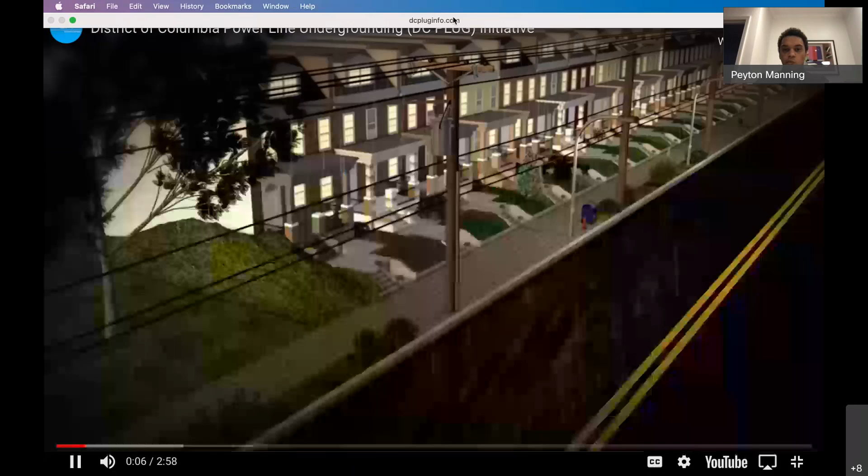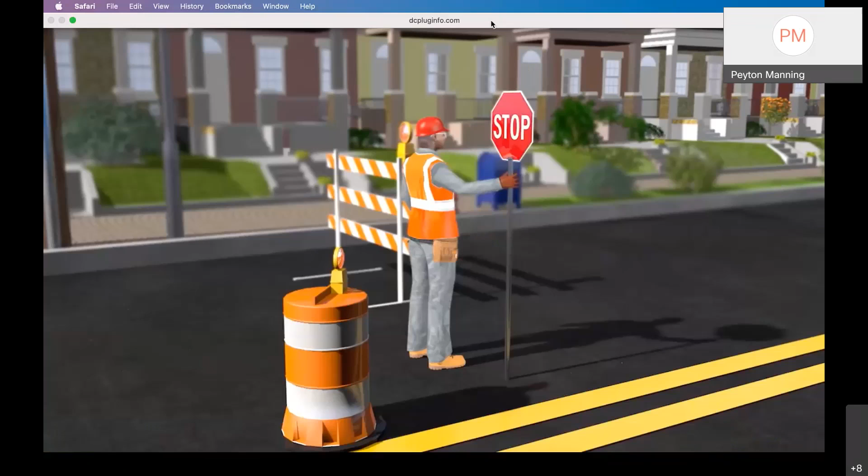The District of Columbia has experienced more violent storms in recent years, resulting in extensive power outages. For this reason, the district and PEPCO are working to reduce power outages by moving many of the overhead power lines underground to improve the infrastructure and enhance resiliency. Neighborhoods affected by construction will be notified well in advance of the project start date. This will include the posting of no parking signs. Construction will begin with the coordination of streets and sidewalks impacted in your neighborhood. Signs will be posted, and flaggers will direct vehicles and pedestrians around construction crews.

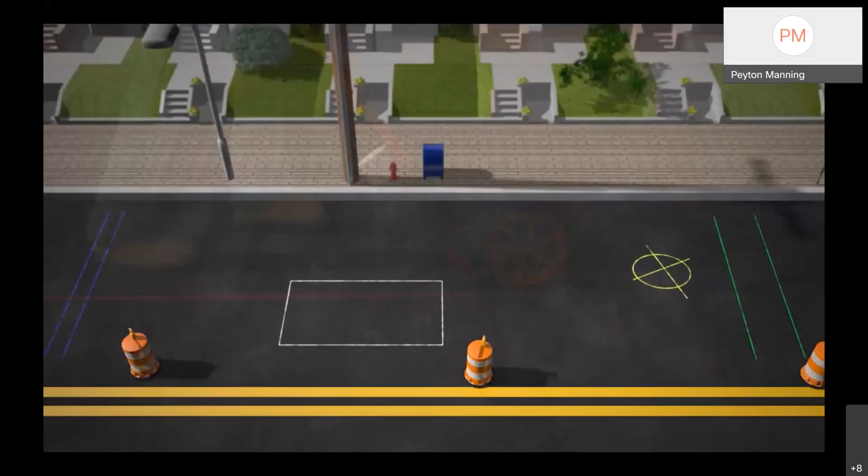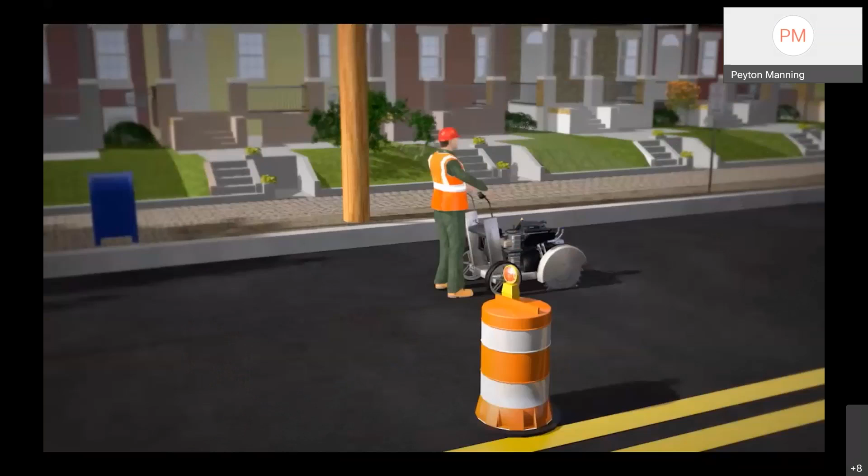Before any digging begins, other existing utility lines that may be in the path of construction will be carefully identified and marked in the field. In some cases, small plants, trees, and grass will need to be removed from public spaces to allow for digging and placement of new underground equipment. But we will do our best to retain as much vegetation as possible. Any public property disturbed by this work will be restored to its original condition. Construction workers will use asphalt saws to cut the pavement. A backhoe will dig a trench for the placement of the distribution line.

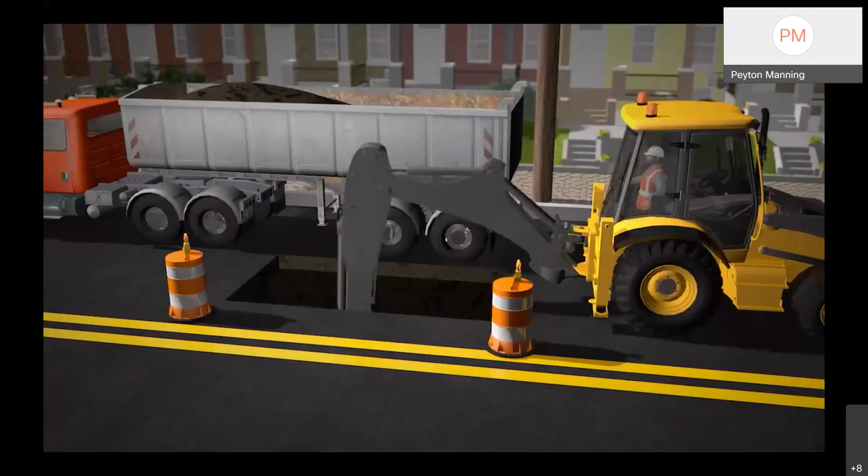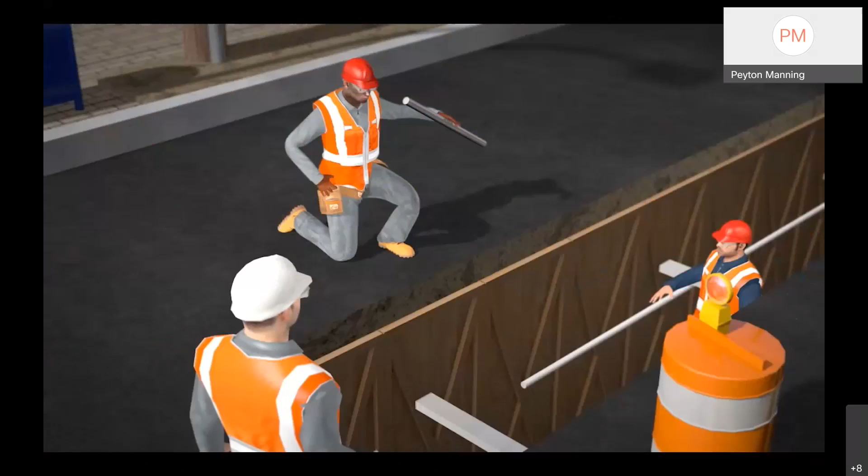Periodically along the main primary line, manholes and tap holes will be required to house equipment and to provide access for inspections and repairs. The backhoe will also be utilized in these cases to excavate for these structures. In order to meet jurisdictional safety requirements, shoring will be provided in the trench to ensure stability. Pepco uses either fiberglass or plastic PVC conduit to protect underground power lines. Concrete will be poured into the trench to encase and secure the conduit, and steel plates will be placed over the trench temporarily to make the road usable to vehicle traffic. After the concrete is set, the steel plates will be removed and the trench will be repaved in sections.

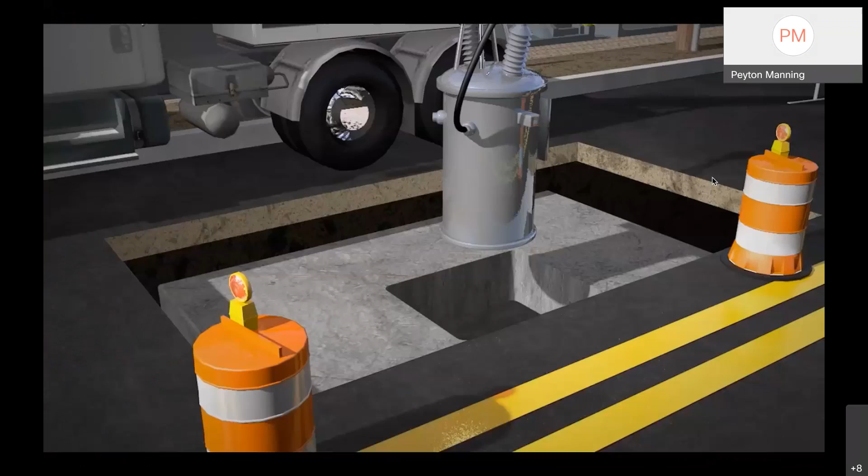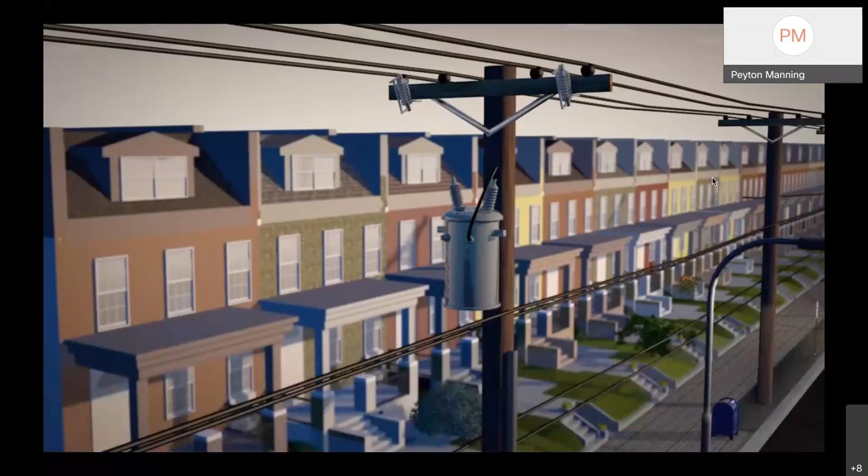Transformers, switches, and other ancillary equipment will be set in place. Equipment such as transformers and switches will be installed either in the roadway or the sidewalk, depending on space availability. Underground cable will be installed. Landscaping will be restored as needed and roads paved. Overhead primary electric wires will be removed from poles, but secondary service and communication lines will remain. Finally, the new underground power lines will be energized. While electricity will remain on throughout the project, there will be a short scheduled outage needed to switch from the overhead lines to the new underground system. We appreciate your patience while the district and Pepco improve the future of electrical service for the District of Columbia residents.

Great. I hope that gave everybody a better understanding as to what the construction will look like when we start. And now I'd like to pass it on to the region president, Donna Cooper, to give some brief opening remarks.

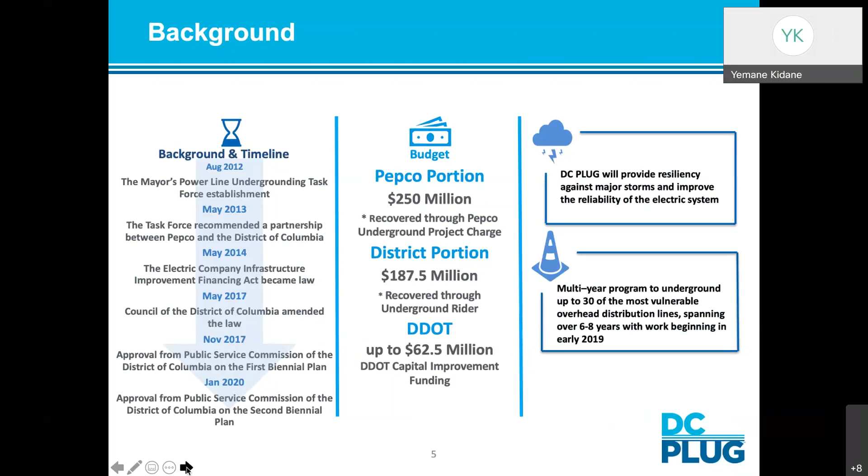Good evening, everyone. My name is Yemane Kidane. I'm the project manager from PEPCO side for DC PLUG. So Dana gave a good background and history on the program, so I'll focus on the scope. So the scope, this schematic here shows the existing overhead system, and on the next page we'll see, when we underground the primaries and laterals, the impact through the outage that residents will see.

As you can see on this diagram here, there is a tree at the top corner of this page where when it falls, as the color changes from green to red, that means each house is seeing an outage as a result of a tree falling on a primary line. You can tell that the entire neighborhood is being impacted by one tree falling on a primary line. So the scope of DC PLUG is to underground primaries and laterals. As we do that, the next page will show the resiliency that will be achieved by undergrounding. Please go to the next page.

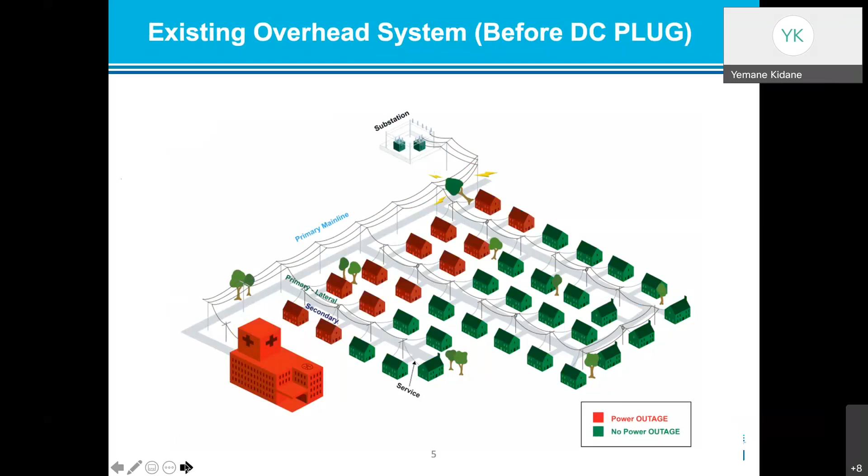Now the dashed lines here represent the undergrounded feeder. So as you can see, when the tree falls, there's no overhead primaries, so it's not gonna hit any wires, and then the entire neighborhood is not gonna see an outage. But the project does not include undergrounding the secondaries. So the secondaries do not provide power for an entire neighborhood, but only a few houses. So as you can see towards the bottom of the page, when a tree falls and hits a secondary, only a few houses will see an outage.

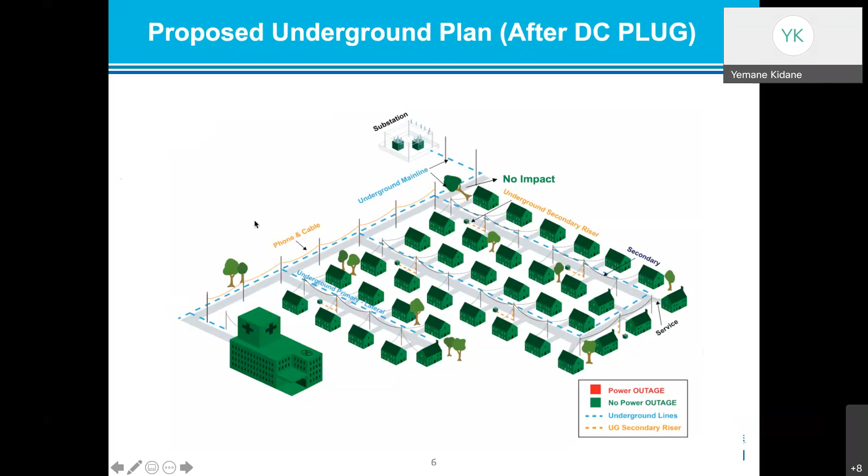So overall, with DC PLUG, we are eliminating large outages, only minimizing outages to a few houses. And as discussed earlier, we are focusing on undergrounding the primaries and laterals, because if we decide to underground the entire system, including the secondaries, the cost will be prohibitive. So that is the scope of DC PLUG overall from a schematic representation point of view. Go to the next page, please.

Here is a timeline for feeder 15009, where we stand. We are currently in the design phase. The design was kicked off in January 2021. We went through the design phase 30%. We met with a council member in April 2021. We've completed 65% design phase. Today we are holding our open house. This is basically an opportunity to present the design to the community, familiarize the project. 100% of the design is expected in 2021, and then the final version of the design is due in December 2021. Next page.

And here's the timeline for construction. Of course, after we finalize design, we have to go through a procurement process to hire a civil contractor. So we anticipate that civil construction will begin in summer 2022 for this feeder. And then we expect that construction is going to take time, and will be completed in spring 2024. At the conclusion of the civil construction, that's when the electrical construction will begin. And then we plan to energize the feeder, basically transfer customers from the overhead to the underground system in fall 2024, depending on, of course, weather and other conditions.

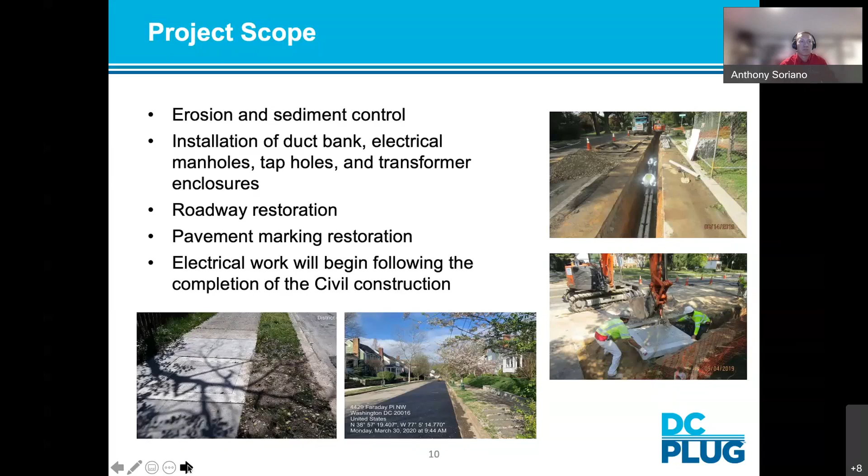And moving on to the next slide, here is a general overview of the project location. I'll note that the northern boundary is Dahlia Street Northwest. It does have an extension up to Dogwood along 9th Street Northwest. Our southern limit is Rittenhouse Street, again with the small extension below Rittenhouse on 3rd Street Northwest. Our eastern boundary is Blair Road. No work aside from a small portion is actually occurring on Blair Road, but that's our eastern boundary. And the western limit is 9th Street. Again, Aspen has a small extension past that 9th Street boundary.

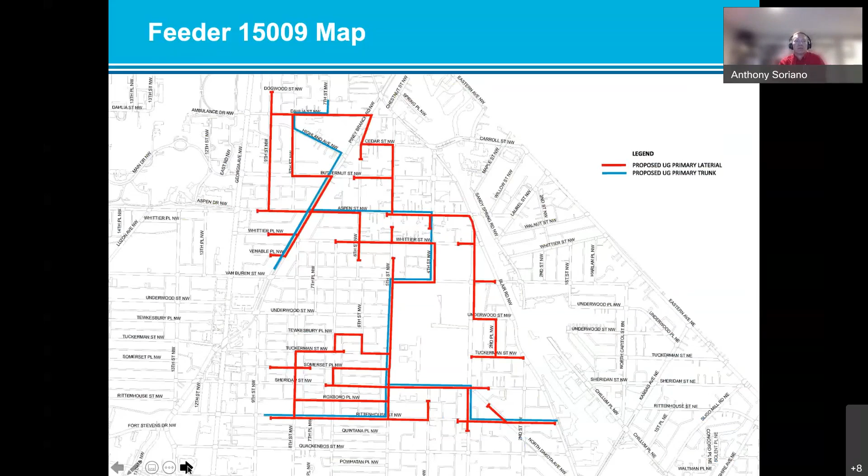The next slides we'll move through rather quickly, but what they'll show is the proposed locations of the underground duct bank, which is in the light blue. The dark blue shows those structures that I pointed out on the previous slide. Now, again, we're going to move through these at a rather quick pace.

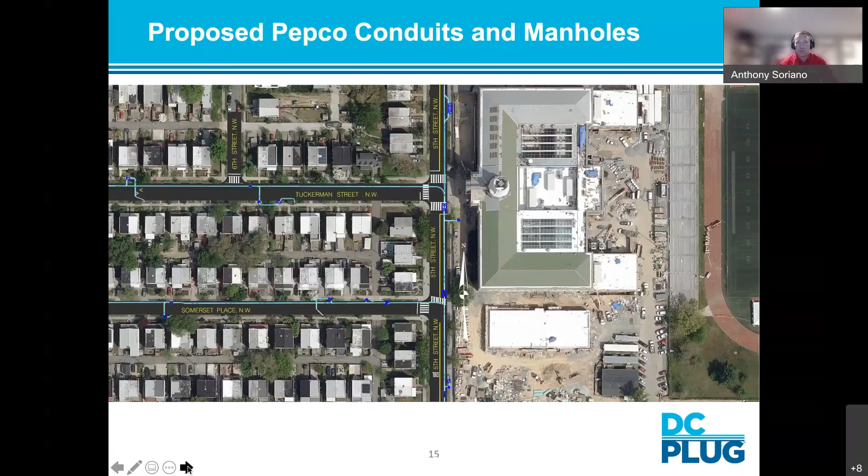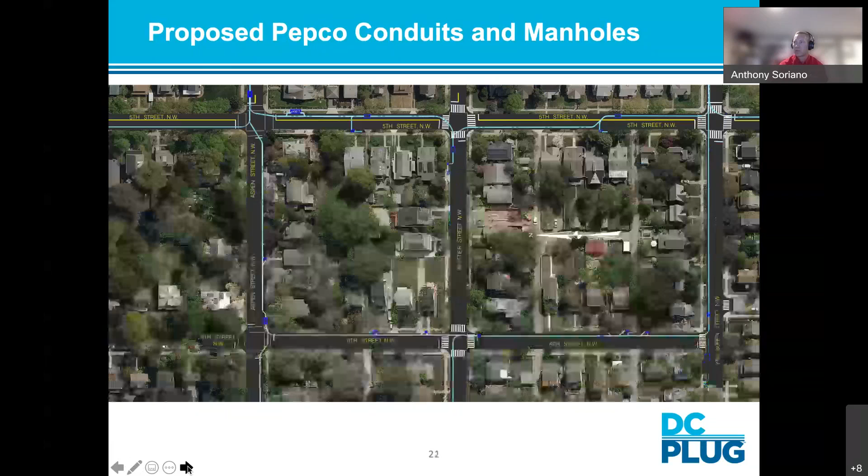So as we move through, what I wanted to point out also is that all of this is taking place within the public right-of-way. We will not be performing any work on private property. Now, there's going to be some structures that are located behind the curb. We look to position those so that they're not directly in front of a residence. We look to get towards the shared property line, and also place them in areas that aesthetically make the most sense. So that's all stuff that's taken into consideration as the design is ongoing.

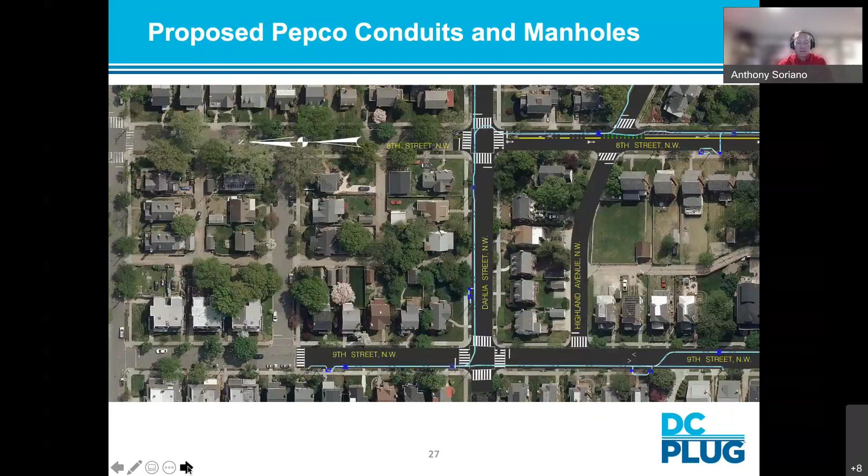And we'll move now into the discussion on our maintenance of traffic during construction. We'll be working to maintain accessibility for the residents and businesses within the project corridors. Parking impacts will occur. There will be advance notice as required by the district. 72 hours in advance, we'll be posting emergency no parking signs. We'll also be maintaining safe accommodations for pedestrians and cyclists throughout construction.

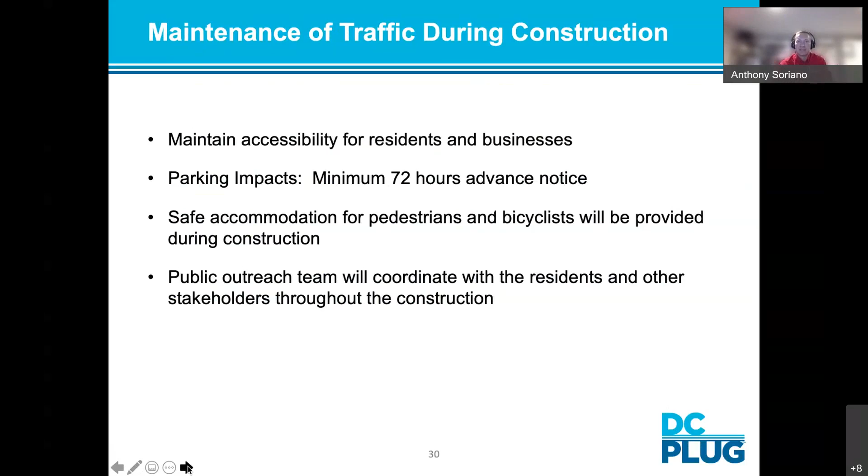And you'll probably get tired of hearing from us because we are constantly providing public outreach to make sure that everyone is aware of what's happening. Occasionally, plans change, and we work quickly to make sure that that information is shared. Now, occasionally, a road may need to be temporarily closed completely if, say, a structure is being installed and a crane needs to put that in place. That's a temporary, day-of type of thing, and maybe contained to just a morning or an afternoon. Again, we will be communicating throughout the project as instances like that may occur. Our next few slides are going to show some general maintenance of traffic configurations.

Mainly we'll show the work with travel in two directions being maintained. So there might be the loss of a parking lane. Occasionally we'll be working on a one-way street, and if that one-way street does have one side of parking, we might have to eliminate that parking temporarily as our work moves through the area. But it'll be rolling restrictions on the emergency no parking, and again communicated with advanced notification as the project progresses.

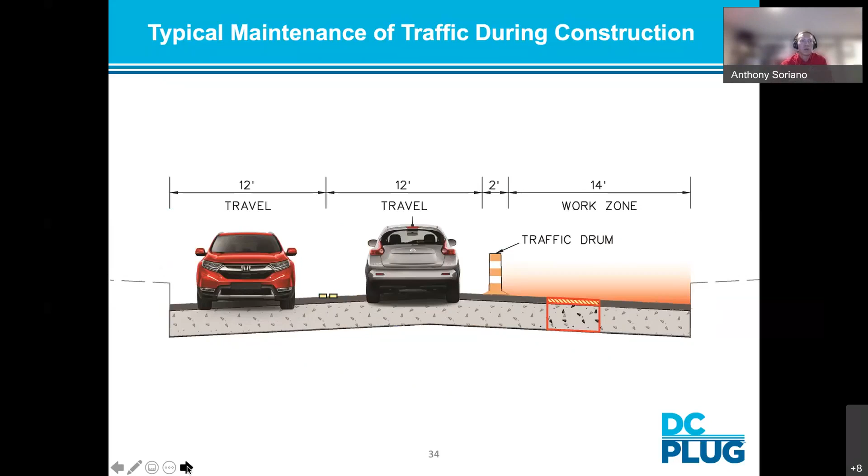And now I'd like to take this time to turn the presentation over to Laisha Doherty, who will speak about the integrated communication strategy. Laisha.

All right, yeah, so good evening, everyone. My name is Laisha Doherty, and I work in PEPCO Government Affairs and I'm leading the communications and outreach efforts for the DC Plug Initiative. One of the unique things about the DC Plug Initiative is that we have a very robust outreach strategy. We find that it's very important to us to communicate to the residents and stakeholders early and often. And so we have set a timeline of events in ways that we wish to communicate with you all and which ways we find are impactful.

So first, we do have a project meeting playbook in which we have meetings during the design phase and also during the construction phase of the project. Right now we are in the design phase, and as mentioned earlier, we have met with the council member's office, we have attended the ANC meetings, and the next phase of that is meeting with you all tonight at our virtual open house. As we continue to move forward through the project, we will do individual notices as needed, which will look like door hangers or a flyer or something in the community to identify something that we're working on. We also will execute outbound phone calls, which will ring to your phone lines and may leave a message, or if you answer, you will hear the message.

As we approach construction, we like to do a 30-day kind of outreach prior to the start. And so we have a 30, 15, and 7-day outreach plan. Again, those look like attending an ANC meeting, hosting another open house, door hanger deliveries, et cetera. Again, we just find that communicating with you all early and often has been really impactful. Some of the common collateral that we use include the undergrounding video, which you all had a chance to view earlier. We also conduct social media outreach using both PEPCO and DDOT's social media handles, #DCPlug. We have project fact sheets, flyers and door hangers, and project maps.

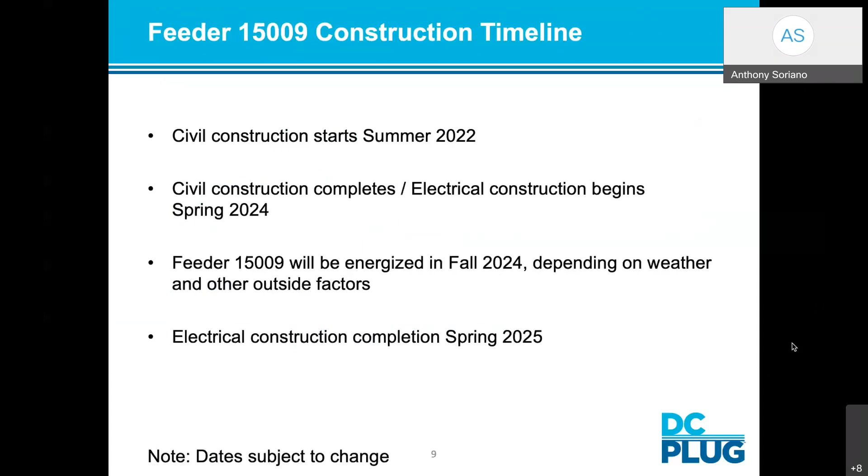Thank you, Yamani. And then one more question, and again, anybody, if you have a question, send it through the chat or through the Q&A. What is the time frame for when this project would be happening, and will we lose power to our house during any phase of the construction? Oh, this is Anthony. I'll take that. We're looking to start the civil construction in the summer of 2022, and expect that civil construction to extend into the spring of 2024. The work will be moving throughout the footprint, and you won't experience that in front of your residence for that entire duration. The second part of the question was about losing power, and there will be coordinated outages briefly when the transfer occurs from the overhead to the underground. Yamani might be able to provide a little bit of additional information on the brief outage.

Correct, Anthony. So during the civil construction, as well as the electrical construction, customers will not see any power outage. The only time your power will be switched off is when we transition from the existing overhead to the new underground system. And that is going to be up to 2 hours at most. But based on our previous experience, we were able to reduce that to less than an hour. But we always say that it could take up to 2 hours to transfer the power from the overhead to the underground. And that's only when we switch over. During civil and electrical construction, there will not be any power outage. Awesome. Thank you so much.

And then also, are you coordinating with the new electrical work at the Walter Reed project? Like Anthony stated, our scope is on the streets that are impacted. I know there is electrical work within the Walter Reed project, which is outside the scope here. But whenever there is an opportunity where multiple projects are within the same street, we do coordinate. Awesome. Thank you so much, Yamani.

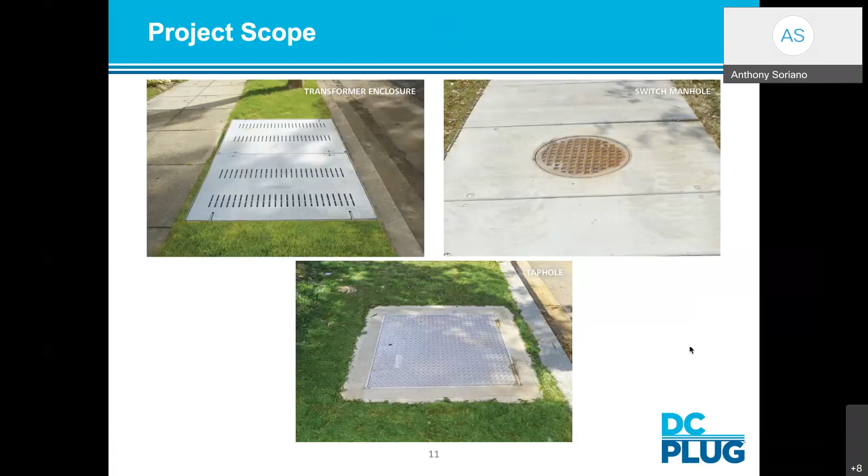Thank you guys. And I switched so you could see the picture of those devices. Right. So that upper left picture is that transformer enclosure, and there will be some conduit that runs from that enclosure to the utility pole, most likely the utility pole that housed the original transformer. Occasionally, we relocate the transformer to a different utility pole, but in over 90% of the locations of an existing transformer, you'll have this transformer enclosure adjacent to or close by the pole that the current transformer is on.

Perfect. Thank you. I just wanted to add one more piece of information. So this is our first feeder in the ward. Under our first and second biennial plans that are approved by the Public Service Commission, so far we have a total of 3 feeders in this ward. So this is the first, and then we will come back with 2 more feeders that are going to be undergrounded as well.

So I just want to make sure that everybody understands that as Dana discussed, we're trying to maintain ward equity. So far under the first and second biennial, each ward that is covered within the DC PLUG scope, which is wards 3, 4, 5, 7, and 8, will have about 3 feeders that are going to be undergrounded.

Perfect. And I see one more question that just came through as well. Is there going to be any change to the electrical wires that come into your house? The electrical wires that come to your house are what we call the secondaries, and the secondaries will remain in place. There will not be any change to the secondaries.